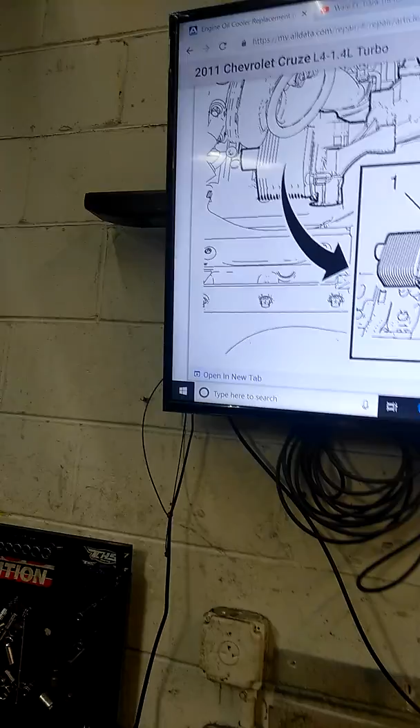So Saturday we worked on a 2011 Chevy Cruze 1.4 turbo. I've seen a few of these cars in last year with bad turbos. This year I'm seeing them come in with oil leaks, and I'm going to cover what we found. Since the car's already finished and out, I want to show you what we experienced.

At the engine block on the bottom you'll see your oil filter housing, and behind the turbo is the actual oil cooler. What we've seen was oil just leaking right out of this area, and it's been leaking for a while. So you can see the oil cooler's here.

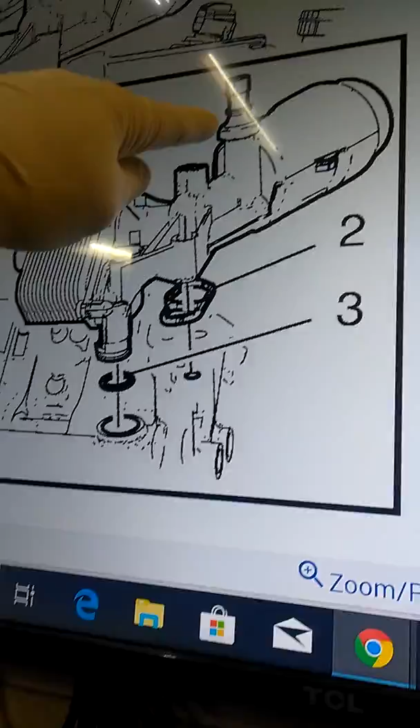The dealer sells this as one entire assembly. It does not come with the oil pressure switch, and it does not come with the turbo oil feed O-ring. I'm going to show you in another picture where the oil feed line is, if it'll let me get in here.

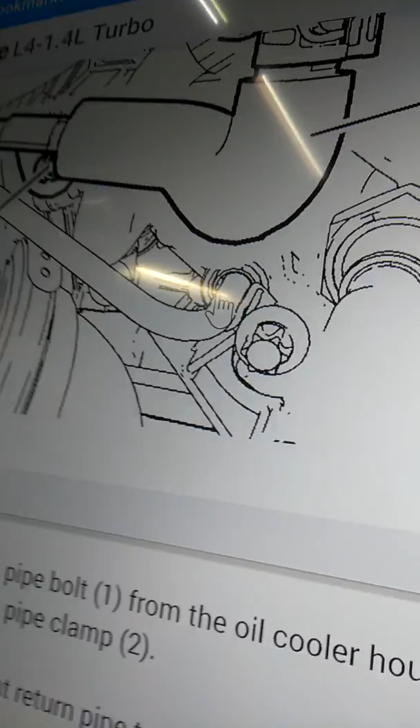So on the oil filter housing, this is the pressure feed line for the turbo. You can get just the O-rings for that. So if you're going to do this job, buy the oil feed line O-rings. If not, buy the whole oil tube assembly, oil line, from the dealer. I think it was $24 or something like that. The one we had had tons of rust on it. It's just a good idea to replace that. They do get clogged up and sludged up over the years, depending on what you're working on.

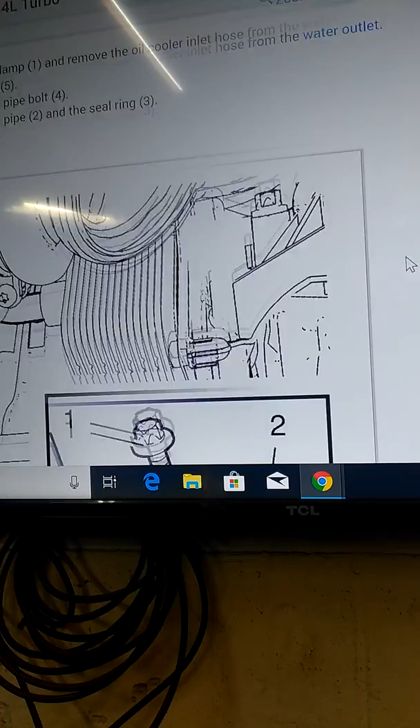So I'm going to tell you, there is no secret to this. I did this without taking off the entire exhaust manifold, meaning taking it out of the car, and I'm going to show you what I mean by that.

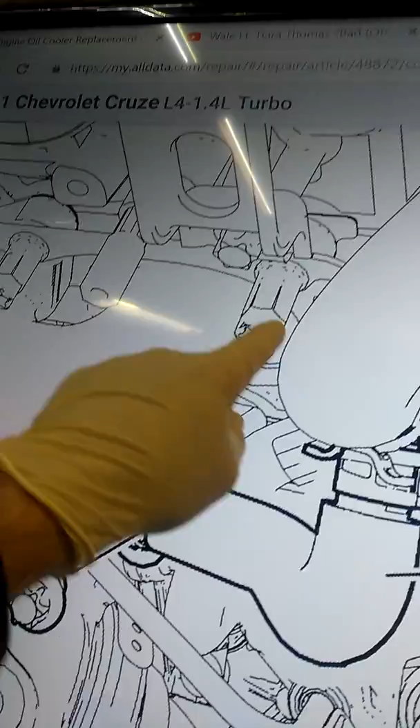If they'll give me a picture. Alright, so here's the exhaust manifold. I didn't take the turbo and manifold out. What I did is I did all the 10mm bolts on it. There's also a coolant tube that goes to the turbo housing right in the back that's on a rubber line. I left that one connected.

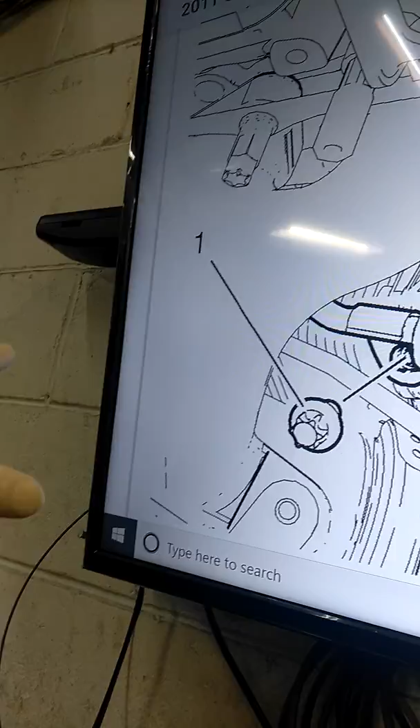So you're going to take off all the bolts that hold the manifold on. Obviously disconnect the inlet pipe, the exhaust pipe. I left the vacuum line connected to be careful with it, and basically what I did is I laid it back towards the radiator while I was working on it. I had another technician hold it out of the way, so I didn't have to take the whole thing apart.

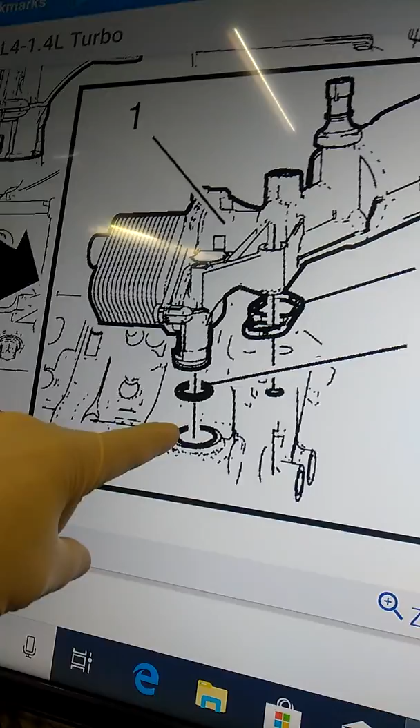And then I'll explain what else goes on. They give us a better picture up here. Let's see, so here's how this works. This tube goes right into the engine block, and then this seal here, I'm guessing, is the feed to the filter, and then that's the return back from the oil cooler.

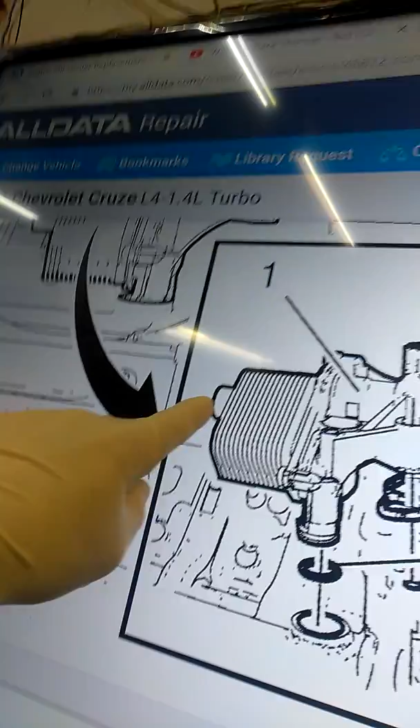So the O-ring comes on the new cooler, the gasket comes on the new cooler, the oil pressure switch does not, and then inside the oil filter housing from GM came with a new filter and cap. Over here is a coolant tube, so that's actually bolted to the engine block behind the turbo.

So remember, the manifold's laid back, there's a few Torx screws here, which are 3, and then one clip that holds a coolant hose on. You're going to wiggle this back, you see how that's inside there? You're going to wiggle it back out, and then slide it off the tube behind the turbo, which is the coolant tube. You'll have to wiggle it just a little bit back and forth. You'll see when you get in there.

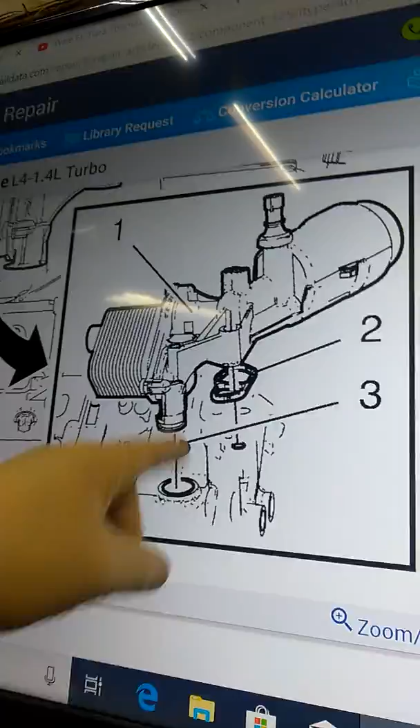This is the first one that I've ever had to do, and like I said, I left the exhaust manifold and turbo in the car, laid it back towards the radiator, so I didn't have to take anything else completely off. Obviously, the converter assembly had to come off. Really wasn't much else to be concerned with that I could think of.

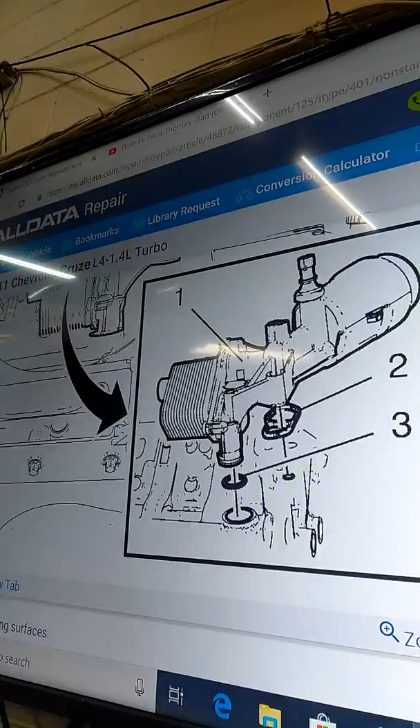When you put this back on, use a little wheel bearing grease here and on the coolant tube. So when you slide everything back together, it goes on nice and easy.

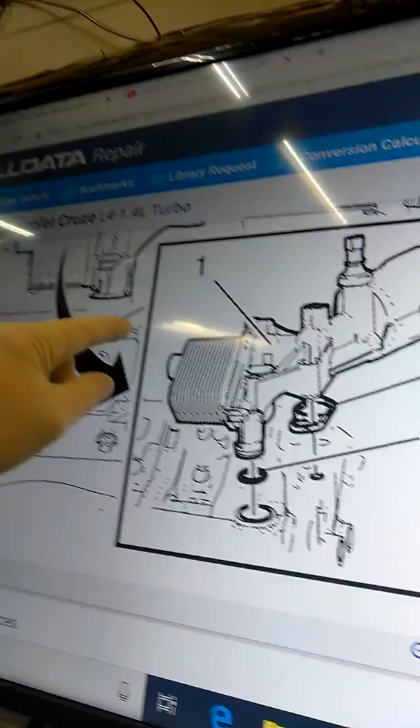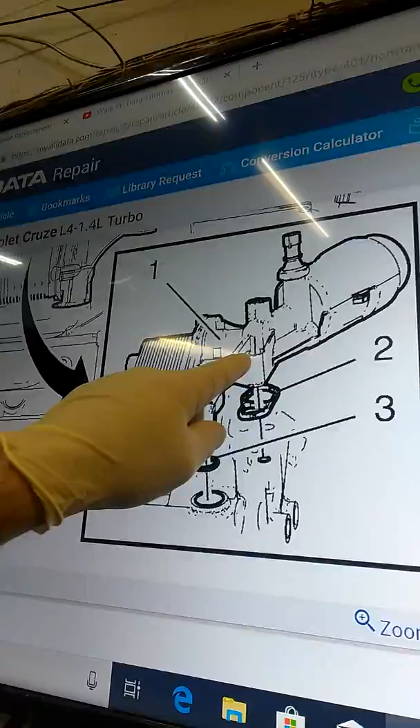This kit also did not come with the cooler tube seal, so be careful, because they were all odd sizes. The O-ring for the oil feed line is not like a normal O-ring. There's actually 2 of them, and they're a very odd width. So like I said, replace the oil feed line to the turbo, or get 2 O-ring seals from the dealer when you do this job.